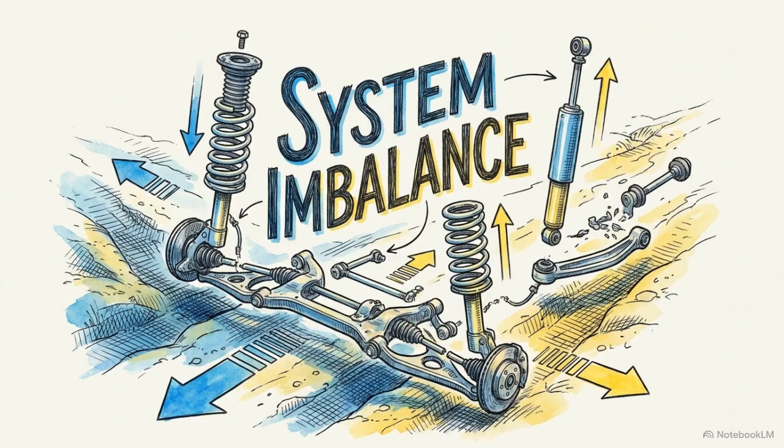We've all been there, driving down an old dirt road, feeling every single bump and pothole rattle right up through the seat. That shaking you feel is the perfect starting point for understanding what engineers call a dynamic disturbance. A vibration is motion swaying around a stable resting position, like a parked car on a flat line.

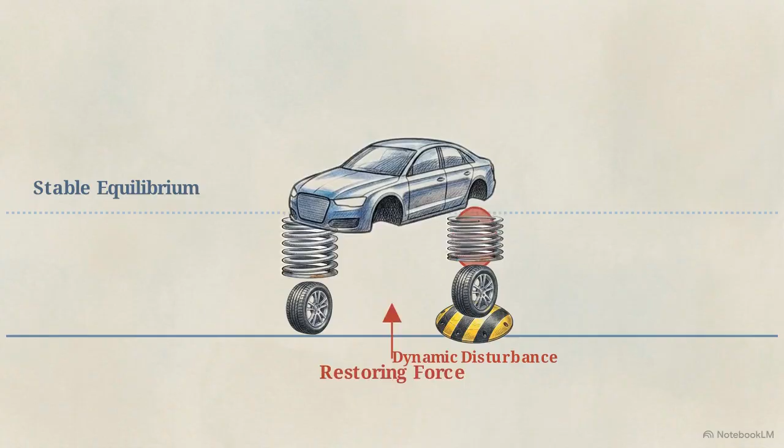Hitting a bump moves it. Inertia pulls it down, but built-in springiness acts as a restoring force, snapping it back. This creates an ongoing, invisible tug-of-war. Inertia pulls the object one way, and the restoring force pulls it back. This battle happens inside almost every solid object when it gets disturbed, from a tall building caught in the wind to the engine running under your car's hood.

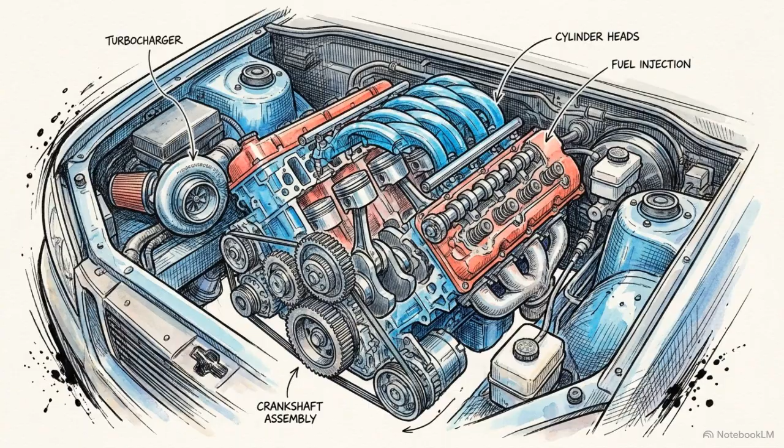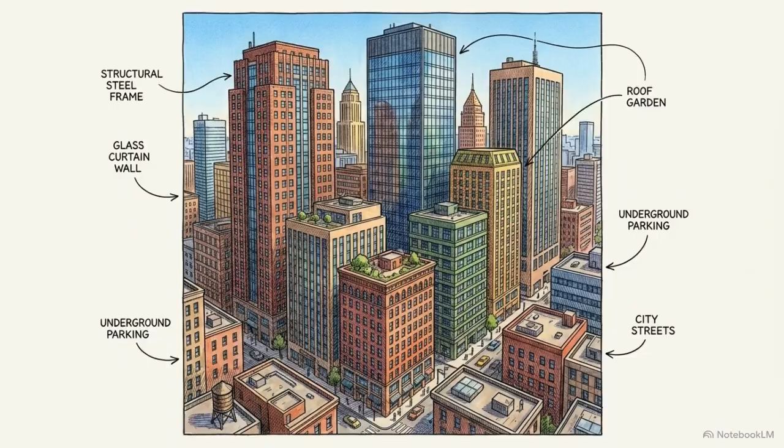Understanding this back-and-forth struggle is the only way engineers can design machines that run smoothly, instead of rattling themselves to pieces over time. When we look at things on a massive scale, we can see why this matters. A brick building looks solid, but during an earthquake, the entire structure starts to act like a spring. If the shaking is strong enough, the internal forces become too much for the materials to handle, leading to a total collapse.

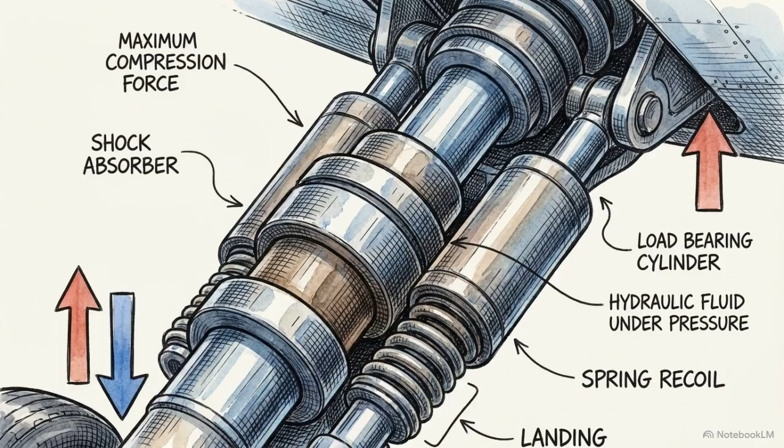We also see these forces during sudden heavy impacts. When a massive airplane touches down on a runway, it's hit by a huge force that lasts only a fraction of a second. This sends temporary ripples of energy through the wings and body that the plane has to be strong enough to absorb.

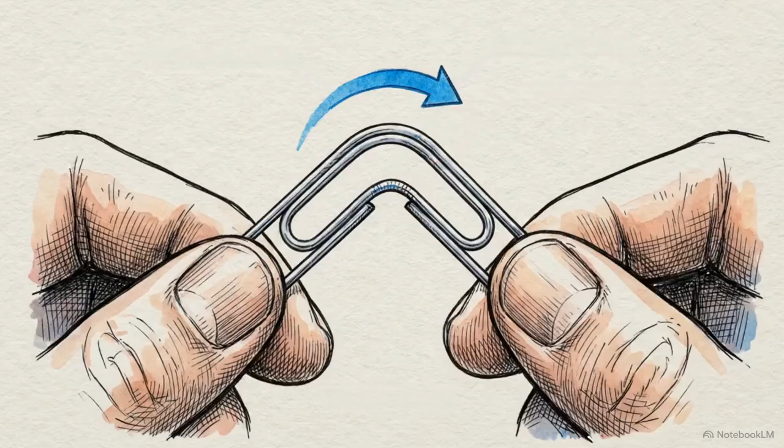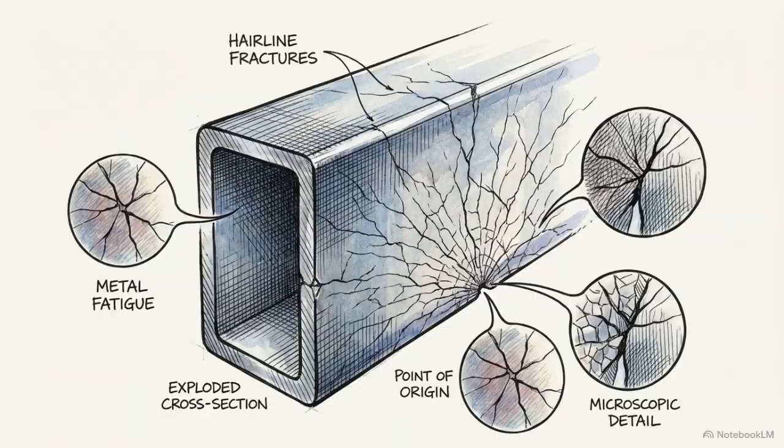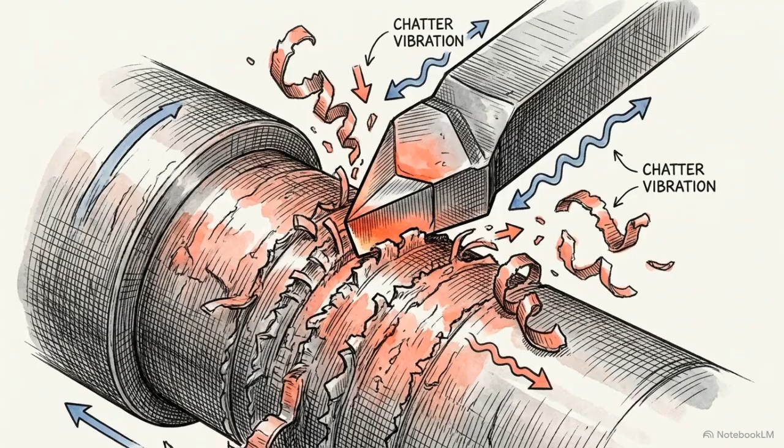Even small vibrations are dangerous if they never stop. If you bend a paperclip back and forth enough times, the metal gets tired on a microscopic level. Engineers call this fatigue. It's when a part eventually snaps because it was shaken just a few too many times. Even when a machine doesn't break, unwanted motion can ruin its work. In precision manufacturing, a tiny, vibrating chatter at the tip of a cutting tool can leave a rough, uneven finish on a part that was supposed to be perfectly smooth.

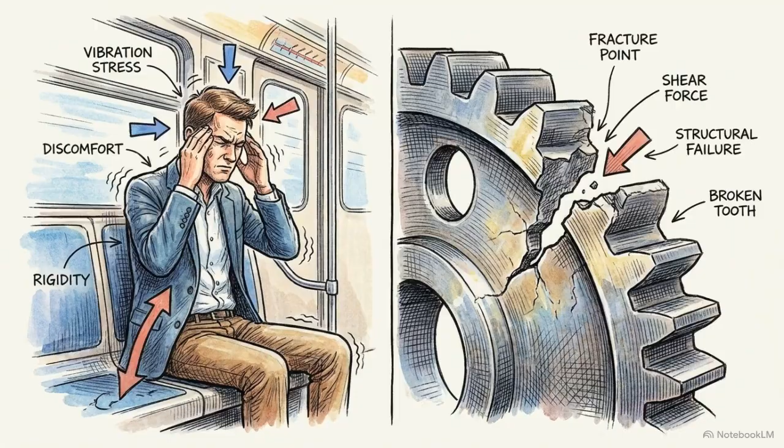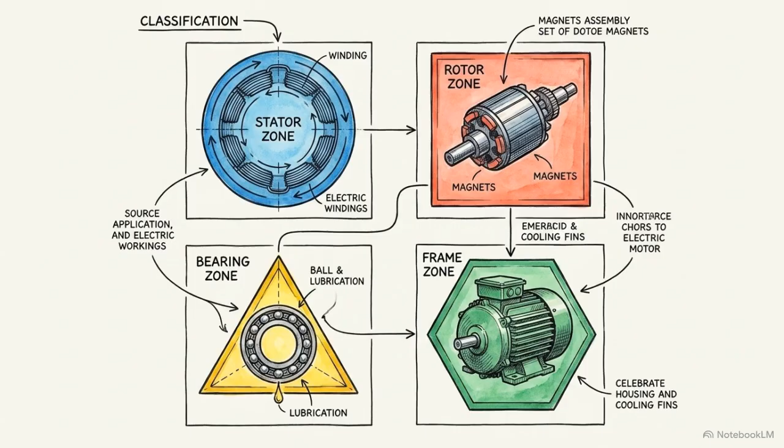Whether it's making a passenger feel sick or causing a machine to fail early, vibration is a constant challenge that engineers have to identify and manage every single day. To stop a vibration, we have to know exactly what kind of shaker we're dealing with. Engineers use a few simple categories to sort them out. First, we look at the source. A free vibration is like a struck bell. It's a one-time hit that slowly dies away.

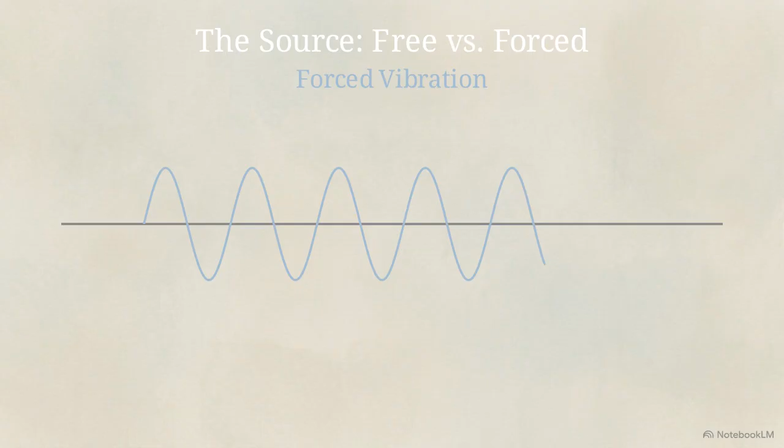A forced vibration is constant, like the steady hum of a running motor that keeps pushing the system every second it's turned on. Next, we look at how the machine reacts when we push harder. In a simple linear system, if you double the force, the shake doubles too. But in non-linear systems, like an overloaded spring being crushed to its limit, the way it moves can become chaotic and much harder to predict.

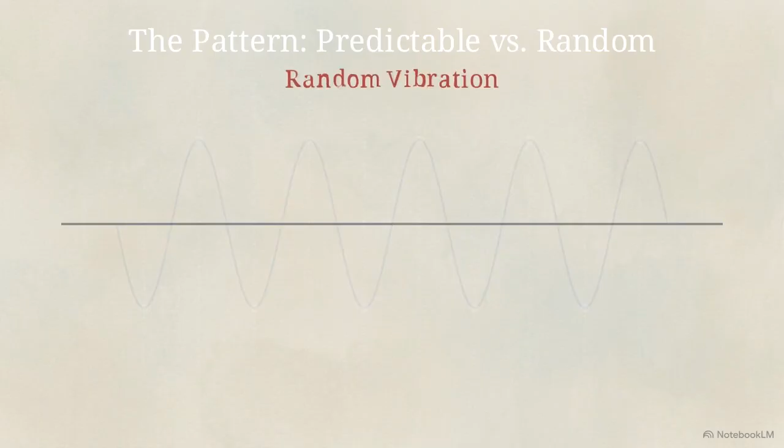Finally, we look at the pattern. Some shakes are perfectly predictable. It's like a steady drumbeat where you know exactly when the next hit is coming. Others are random, like a car driving over gravel. You can't predict every single tiny bump, but you can measure the general roughness of the whole road.

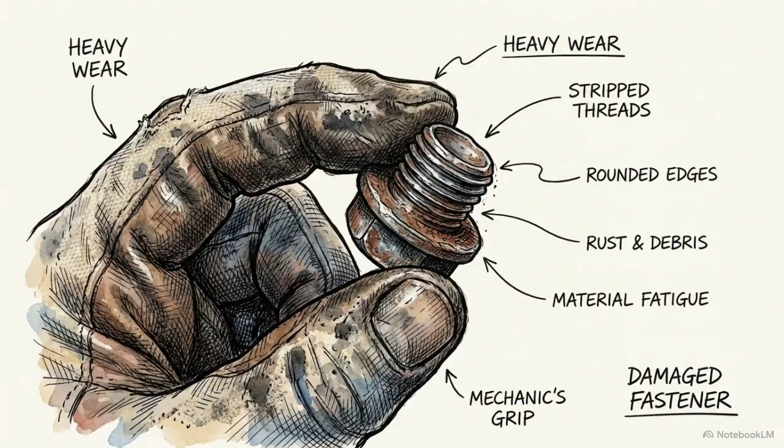Engineers use these categories as a checklist. They inspect for worn-out parts, listen for specific humming sounds, find where vibration is strongest, and measure the object's natural rhythm. Once they have the data, they can change the design, perhaps by adding weight, making a part stiffer, or adding rubber mounts to soak up the extra energy. By putting the vibration into the right category, engineers can use math to find the perfect solution to keep things steady.

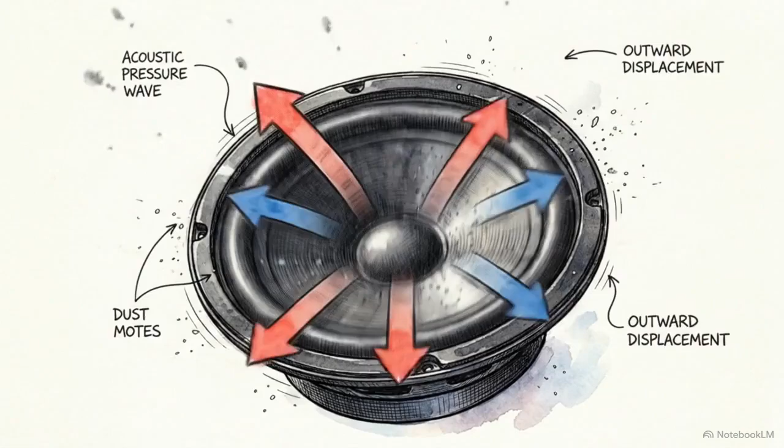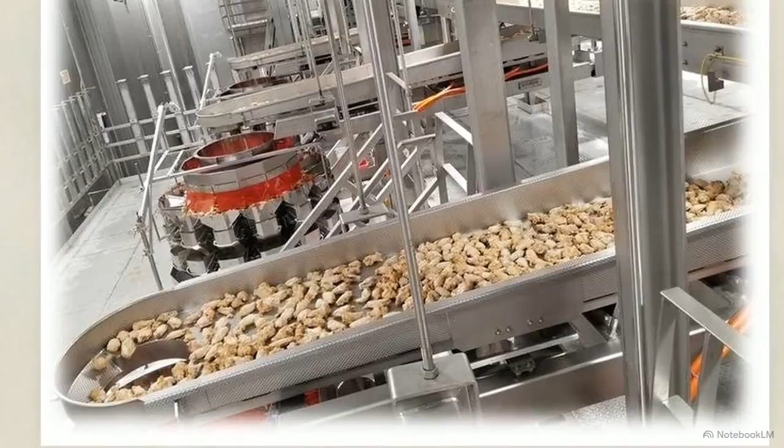So far, we've treated all this shaking as a problem. But what happens when we want a system to vibrate? When we control these forces, they become incredibly useful. In food factories, engineers use a steady, predictable shake to gently move and sort through millions of items with a level of speed and care that human hands couldn't match.

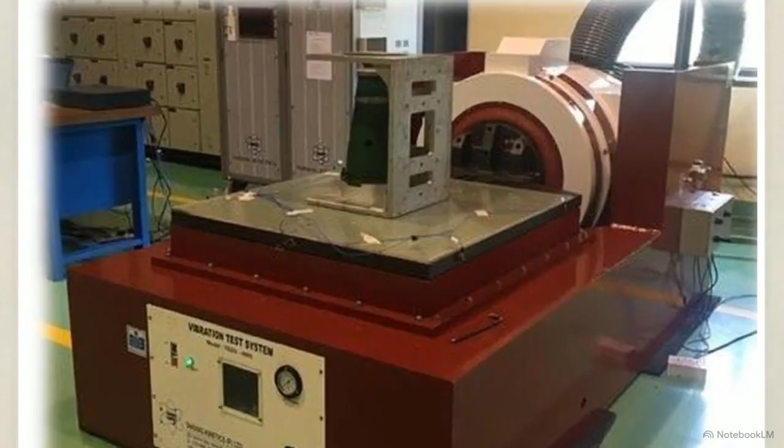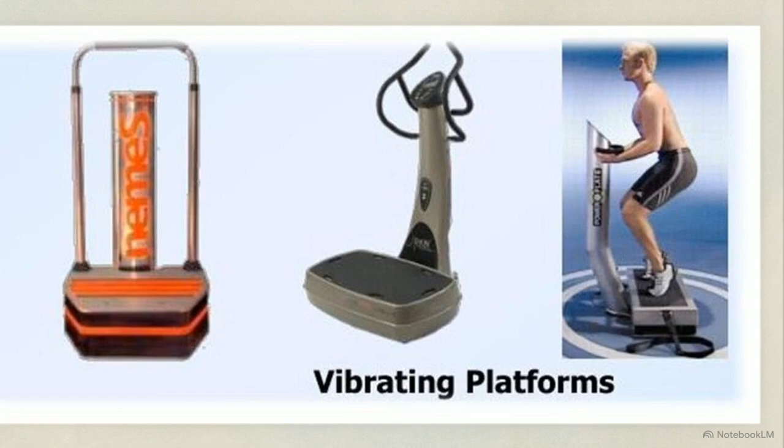We also use massive industrial shakers to test parts before they ever leave the factory. By intentionally shaking a new machine in a controlled way, we can prove it's durable enough to handle years of real-world use. Shaking can even be therapeutic. There are special platforms designed to send vibrations traveling through the whole body, which can help with physical recovery and muscle conditioning.

When you understand the physics behind it, vibration stops being just noise or a nuisance. It's actually a predictable way to move and use energy. So the next time you hear a car rattle or feel your phone buzz, take a second to think about it. You're feeling that same invisible tug of war between inertia and springiness, working right there in the palm of your hand.